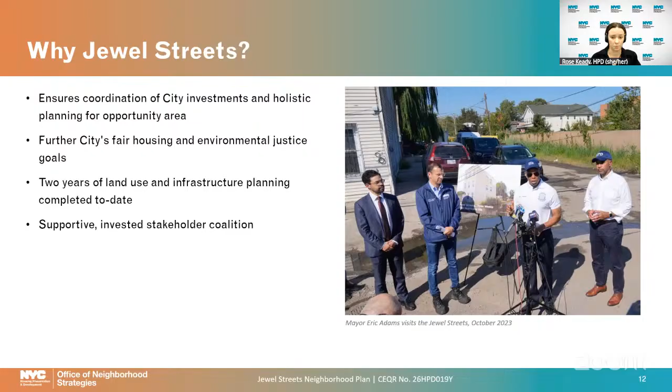The plan is also the culmination of 3 years of public engagement and visioning with local residents and a really committed coalition of stakeholders. This holistic plan includes long overdue commitments to construct a climate-resilient sewer system in a neighborhood that has needed sewers for decades, new bus lanes and traffic safety improvements on Linden and Conduit, new housing on major corridors and city-owned sites, as well as ongoing enforcement to improve day-to-day quality of life as the long-term investments are taking shape.

So many of you are really familiar with the study area, but before we get into the neighborhood plan content, we're going to start with some background to show how we got here.

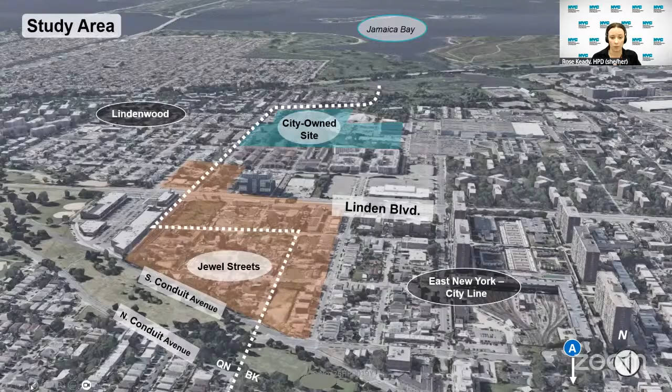Conduit Avenue is on the bottom of the screen and is our northern border. Both Conduit and Linden are really wide streets without many crosswalks, making it really difficult to get around the neighborhood. Last, the shape in blue is the 17-acre, largely vacant city-owned site 2 blocks south of Linden, where we see a big opportunity for a variety of uses.

So in the past few years, we've had a lot of community engagement to get to where we're at now in terms of priorities. We held 6 workshops with over 300 participants, 6 neighborhood tours, bi-weekly meetings with local stakeholders, and additional specific meetings for residents to speak directly with agencies about quality of life concerns and the immediate short-term work being done in the neighborhood.

So the work in the Jewel Streets has really been happening for both the short and the long term, running on parallel tracks. There's a lot of work on the ground that's already been happening in the neighborhood. We have some really amazing agency partners, including the 75th and 106th precincts at NYPD, DOB, DSS, and DSNY, who have mobilized under the umbrella of Community Link to conduct joint agency operations to address the most immediate quality of life issues in the neighborhood.

DEP has also already been doing a lot of work in the area to provide temporary relief to flooding conditions while developing the long-term drainage infrastructure plan for the neighborhood, including installing catch basins and constantly responding to the neighborhood after storms. And DSNY and DOB have both been really critical on addressing the illegal industrial businesses in this residential area, addressing abandoned vehicles, and clearing up debris.

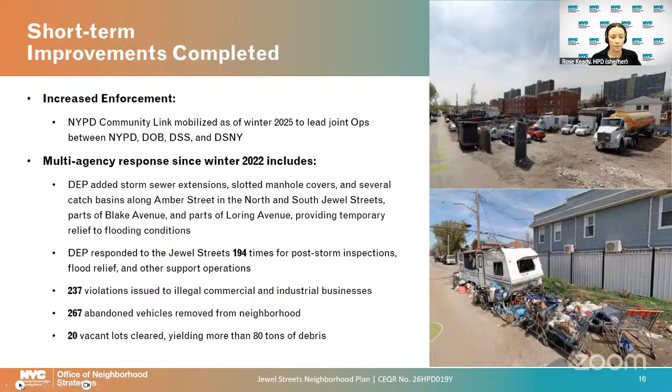But we know that installing new infrastructure is not enough, so we have many layers included in our plan to lead to a safer and better neighborhood. We've also developed a land use vision for the area, which Paolo will step through, but it's mainly defining what land use changes can support the future of this area.

And related to that, we've developed a community-supported vision for the city-owned site. This is a really big site which could accommodate affordable housing, jobs, open space, and also increase connectivity across the neighborhood.

We're working really closely with teams at DOT, thinking about the future of Linden and Conduit. There are active DOT studies happening on both corridors, and also in a wider strategy to make streets safer and make it easier for people to get around, including improving transit. And finally, we're also thinking about adding jobs, community services, and businesses to support a strong community.

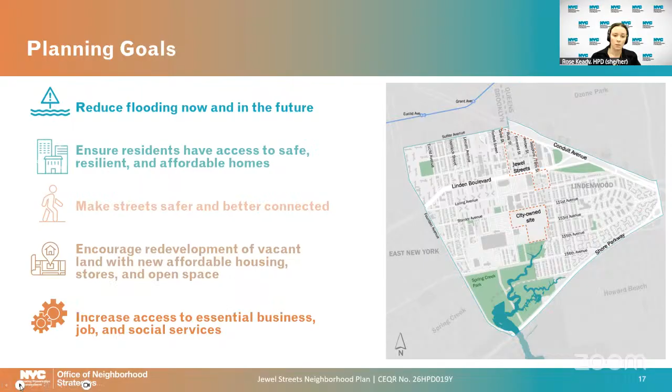Commercial uses are permitted in some places along Linden, like at the Lindenwood Diner, the former Cineplex, and Linden Center. Though as you can see from the zoning districts currently mapped there, there are a lot of gaps in where commercial uses are actually allowed to be built.

So we know that zoning is a tool that can really encourage development that's aligned with the community vision and all of the goals and strategies that we just went through.

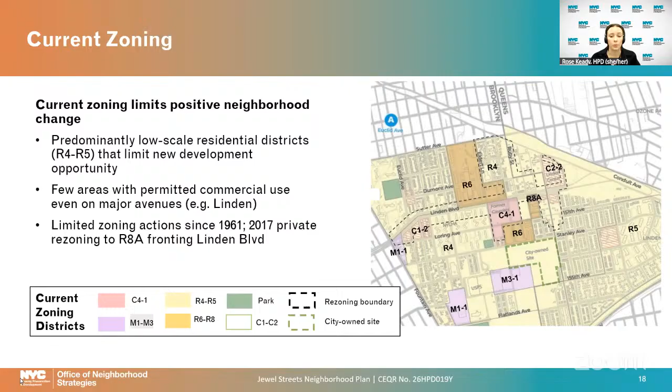On Conduit, we're not contemplating any land use changes, although DOT is working on a study here to rethink the street design and improve safety, which we're very much a partner on. And then lastly, in the Jewel Streets, our number one goal is to reduce flooding and improve quality of life through new green infrastructure like Bluebelts and other capital investments.

And this planning framework really lays the groundwork for our proposed rezoning, which Paolo will share later in the presentation.

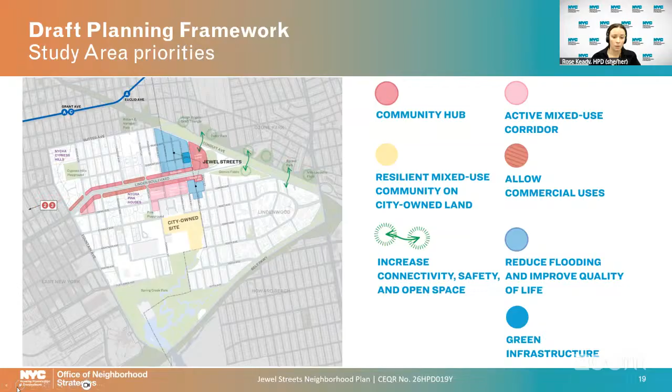So just to quickly recap where we're at today, this planning process really started from a call to action letter that Jewel Streets residents, community organizations like the East New York Community Land Trust and Cypress Hills Local Development Corporation, and other local elected officials sent back in February 2022, asking the city to begin addressing the flooding, infrastructure, and quality of life issues in the neighborhood.

HPD started our engagement in June 2023, where we held those workshops. The last one was in October 2024, where we presented the draft strategies. We released our progress report in February, which included the planning framework that we just saw. And we released the neighborhood plan this October. Today, we're here at environmental scoping and looking to the near future next year. We'll be starting the neighborhood plan and Bluebelt Joint ULURP.

And with that, I will hand it to Paola to walk us through the drainage, transportation, and land use strategies by sub-area.

Thank you so much, Rose. So getting started with the Jewel Streets, the goal here for this sub-area is to really create a more resilient and connected neighborhood with better drainage, improved streets, and new housing that can respond to future climate impacts.

So we're doing this by continuing the immediate short-term quality of life work in the neighborhood in partnership with many agencies that Rose talked about earlier. And at the same time, we're looking to the future. So DEP's drainage infrastructure plan will guide this change, and we'll get into the details about that next.

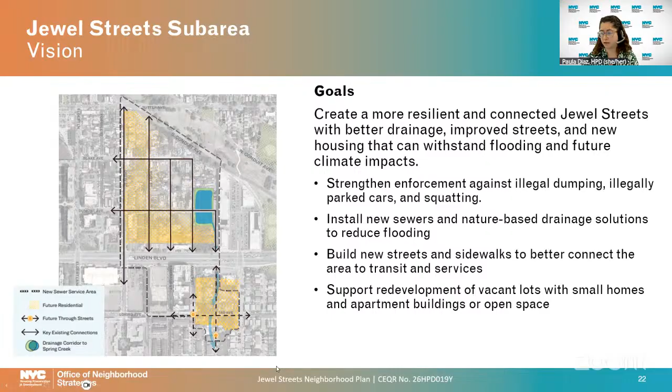So we know that you're familiar with the area, but before we go into the drainage strategies, just want to spend a minute talking about why the Jewel Streets flood.

So there are two main factors at play. The first one is that the neighborhood is in the historical path of Spring Creek. So the streets are below grade and there is a high water table. And in addition to that, there is no stormwater or sanitary sewers.

So what that means is that for the water, it's really easy to get into the neighborhood. And once it gets there, it's really hard to drain it out.

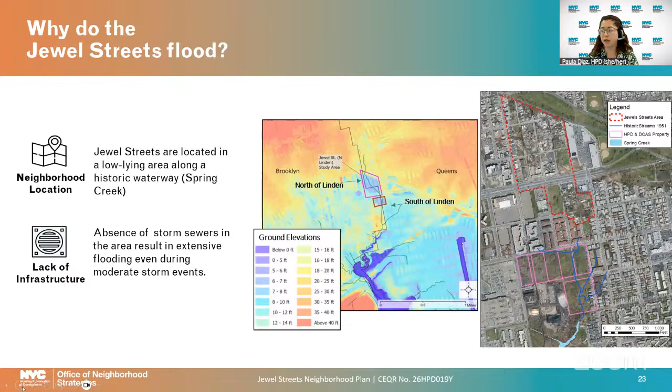So what are we thinking in terms of the future? What you see here is DEP's holistic drainage infrastructure plan, which includes a mix of gray and green infrastructure with components in the north and the south Jewel Streets, as well as in the city owned site.

So the key features of their plan are a network of four blue belts or retention ponds, two in the north Jewel Streets, that area that you see in blue, two in the city owned site further south, new stormwater and sanitary sewers for serving this neighborhood, and also new raised streets in the Jewel Streets, that in the south we know that it would be up to 10 feet for the water to be able to get through gravity to the city owned site.

And finally, all these systems are complemented by a storm and sanitary pump station that will be located in the city owned site, taking the stormwater to Spring Creek.

Here, we also want to highlight that this plan is really designed to meet New York City's highest stormwater service level, managing a rainfall from a 10-year storm.

That is approximately 2.3 inches of rain per hour. And just for context, most of New York City is still designed to serve up to 1.7 inches of rain per hour. So DEP is really thinking about serving this neighborhood in the future.

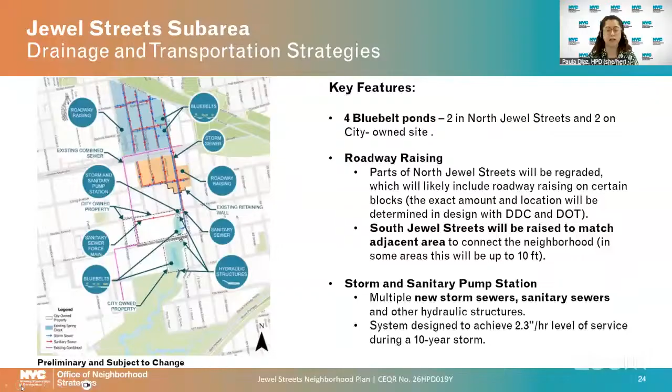So in this cross section, you can see how these components are working together a bit more clearly, and how this is a creative and holistic solution for the neighborhood. In blue, you see the stormwater system, and in brown, the sanitary sewer system. In blue, you see how the stormwater system is complemented by the network of blue belts, or retention ponds. This nature-based solution is used to filter the stormwater and also serve as open spaces that residents can enjoy.

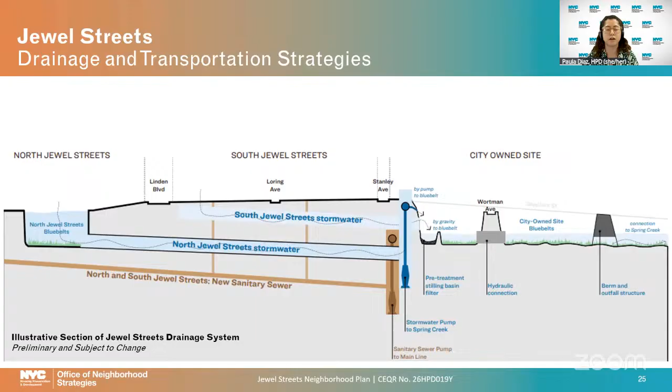The water from North Jewel Street is being directed and pumped to the city owned site, and then the water from South Jewel Street is going by gravity to the blue belts. The sanitary sewer from the north and south are combined, and they're being pumped to DEP's main line, also on the city owned site. That will really eliminate the need for septic tanks in the neighborhood, which is one of the key drivers for environmental justice in this neighborhood.

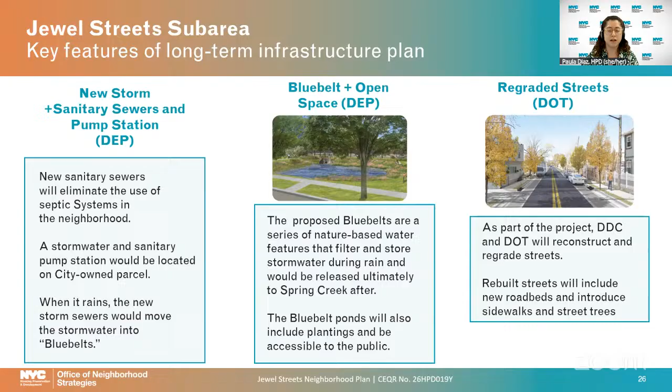So we went through these components already. This is just a summary of everything we just discussed, but here we want to highlight that in addition to this new drainage network, the streets will also be regraded in a project led by DOT and DDC, and this will bring sidewalks and trees to the Jewel Streets.

Supporting all the infrastructure work we just discussed, we're also really excited to share that, back in September, the Jewel Streets will actually be a pilot neighborhood for the city's new resilient acquisition program. This program is being piloted here to ensure that residents living in the most impacted and lowest lying portions of the neighborhood will have the city's support to navigate options to relocate to less flood-prone areas.

At the same time, as part of this pilot, the city will also work with homeowners to navigate options to retrofit their homes as the long-term drainage plan takes shape. The expression of interest you see on the screen has been live since September, and the city has already received some interest from residents.

Moving on to land use, starting in the North Jewel Streets, here we really want to support the redevelopment of vacant land and industrial lots in the areas where we know the planned drainage infrastructure will be able to support this new development.

We'll go one by one. We're going to start with the light yellow portion in the middle of the screen where it says R5. Here we'd like to support the level of density currently seen on Drew Street, where there are small homes and apartment buildings. So we're proposing a slight bump in density, going from R4 to R5. That means going from allowing 2 to 4 stories, matching the zoning of most of the surrounding neighborhoods. This area will be serviced by the new drainage infrastructure DEP is planning and the new streets, so this small increase in density is really to allow for new infill housing on the vacant lots.

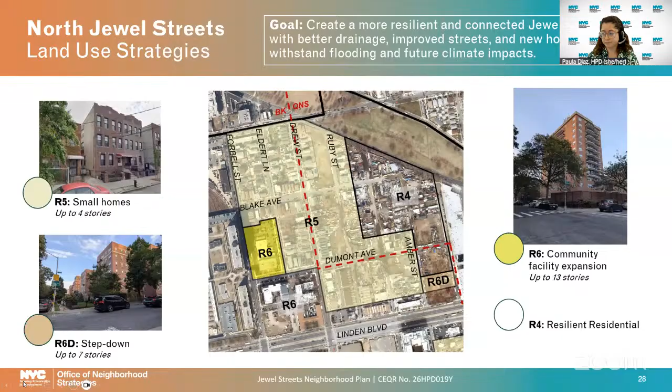So in the South Jewel Street, as part of the planned drainage infrastructure, there will be new elevated and reconnected streets, which could encourage a mix of uses such as housing and open space. Mirroring what we went through in the North Jewel Streets, we're proposing a rezoning from R4 to R5, allowing for small homes and apartment buildings of up to 4 stories, matching the zoning of most of the surrounding neighborhoods.

Below Linden, mirroring what we saw in the north, we have a step-down district to transition to lower density. Along 79th Street, which is at grade and has access to sewers, we're proposing an R6D district, up to 7 stories, and closer to Linden, an R6A, up to 9 stories. We're including this last one on the map, but it's actually part of an existing private application currently in review.

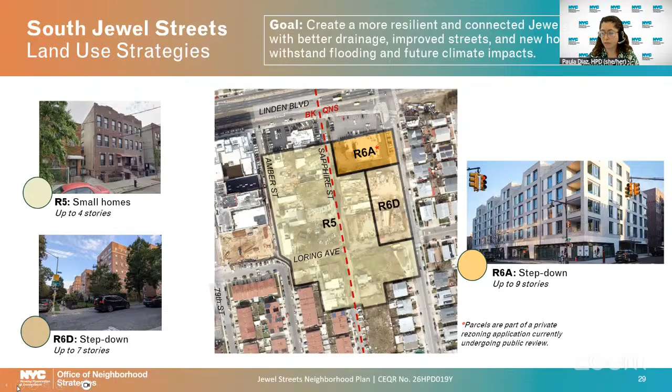Moving on to Linden, our goal here is to support a safer and more active corridor through adding new affordable housing, businesses, and community services. This includes making the boulevard safer for pedestrians, improving connectivity to transit, and encouraging the redevelopment of vacant lots along the corridor with new housing, stores, and community spaces—everything we heard throughout community engagement that is much needed in the area.

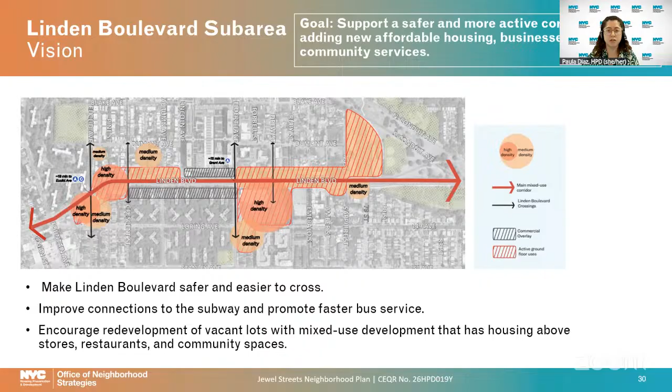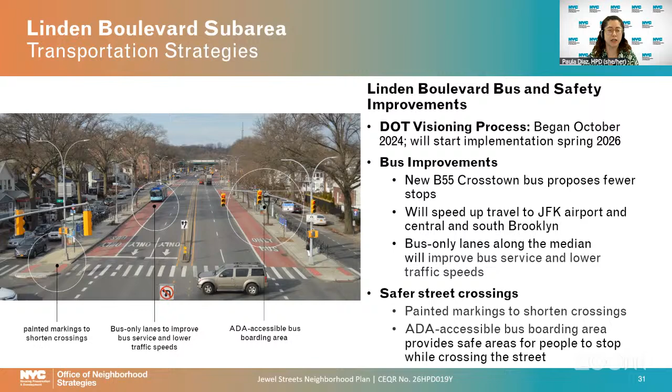Moving on to transportation, DOT is currently working on a bus and safety improvement plan for Linden, which they began late last year, and implementation of some pedestrian safety measures will start as soon as next spring. So we're looking at DOT when it comes to transportation strategies. In the interest of time, I'll keep moving to the land use piece on Linden.

Linden connects the neighborhood to other parts of the city and has the potential to knit these neighborhoods together, connecting East New York and Lindenwood, both North and South Jewel Streets. What you see in pink is a proposed increase in density across the corridor to a C4-5D district, up to 12 stories, to spur development, especially on vacant lots, with multiple floors of commercial uses below housing. In darker red, you can see our community hub nodes at two key locations connected to streets that go up to Euclid and Grant Avenue subway stations.

We're planning for densities of C4-5X and C4-5, up to 14 stories, to create these activity hubs with a mix of retail and community services on the ground floor and housing above. In hot pink, you'll see a C2-4 commercial overlay, which doesn't change the underlying residential zoning—it simply allows flexibility for commercial development to occur in the future if desired on these Linden frontages, complementing the active corridor along Linden. Lastly, same as for the Jewel Streets, in orange we have R6A and R6D, allowing 9 and 7 stories respectively, responding to Linden as a step down before the lower density residential.

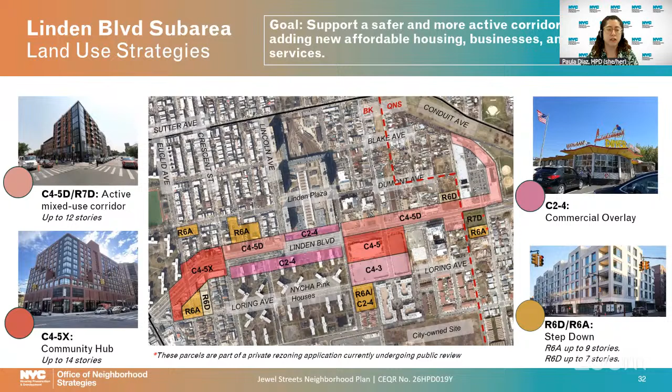Moving on to Conduit, the main goals here for the corridor are to increase connectivity, safety, and open space, and also focus on reconnecting the communities on either side of the corridor and making it better for pedestrians, bikes, transit, and cars.

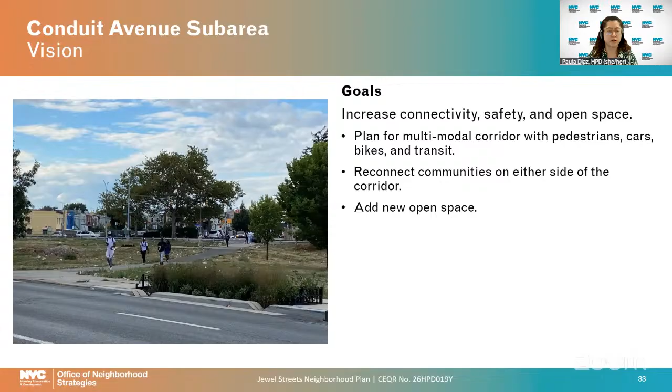As we mentioned earlier, in Conduit we're not considering any zoning changes, so the main strategies here come from DOT's existing study, which includes the Jewel Street section in the middle but goes from Atlantic Avenue in Brooklyn to Lefferts Boulevard in Queens. They've already begun their work—some of you may have joined their workshops. Their plan is to release a final plan by the end of 2026, with implementation to follow. Their possible outcomes for the study focus on safety.

That means more space for people walking and on bikes, including crosswalks with shorter crossings. The second focus is green space—public parks that include drainage systems like green infrastructure and retention ponds, because that median really floods a lot. The last is reclaiming and activating the median for community uses.

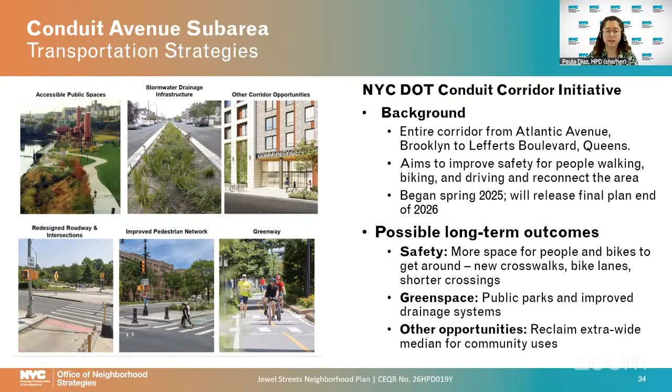Moving on to our last sub-area, the city-owned site, we think this is a great opportunity to develop a resilient mixed-use community with affordable homes, retail, and community spaces. We're thinking about new streets that can break up this super block and reconnect the neighborhoods south of Linden, as well as new open space and green infrastructure to benefit both the new development on the site and the broader neighborhood.

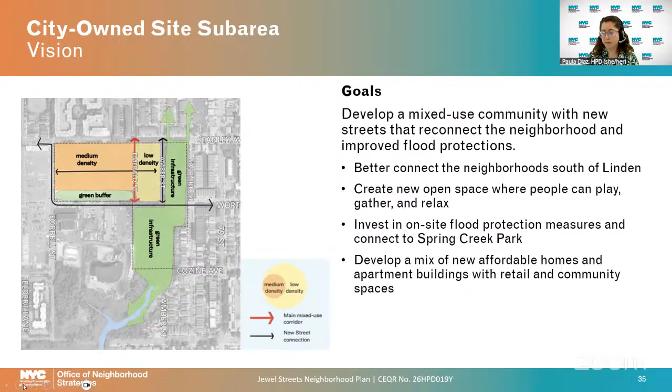Focusing on the drainage and open space strategies, starting with drainage: the green infrastructure located on the site can support DEP's continuous drainage corridor that connects north of Linden Boulevard, through the Jewel Streets, down to Spring Creek Park. This supports the drainage solution for the site and the surrounding area.

On open space, the Bluebelts, like the ones on the Jewel Streets, will be accessible to the public with walking paths and seating areas. These open spaces also connect to the restoration of 40 acres of wetlands around Spring Creek being done by the Army Corps of Engineers. The site can also include other open spaces, like a commons and smaller plazas for people to gather.

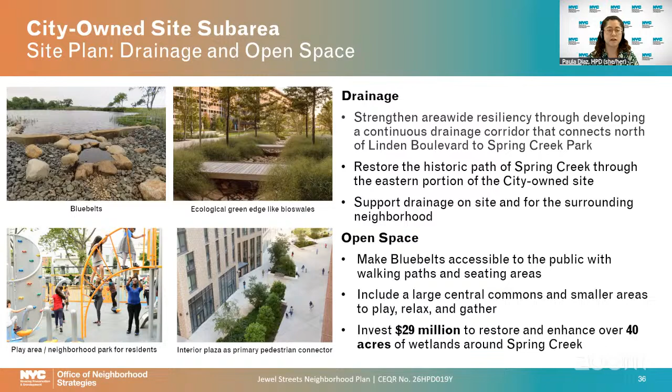Moving into transportation and land use, we're working closely with urban design consultants and the Department of City Planning to summarize and show what we heard throughout the community engagement process. This map highlights the transportation and land use priorities for the site.

On transportation, the main focus is completing the missing links in the street grid, making Wortman the main east-west connector, and continuing Amber and Emerald as north-south streets, prioritizing Emerald as a neighborhood connector since it goes up to Linden Boulevard.

For land use, density can be moved around the site, but the general thinking is higher density toward residential buildings along Linden and the nearby NYCHA campuses, and lower density near the homes by Lindenwood, Queens. We're also thinking about a mix of homeownership and rental, as well as a commercial overlay that would allow retail and community spaces to activate the area.

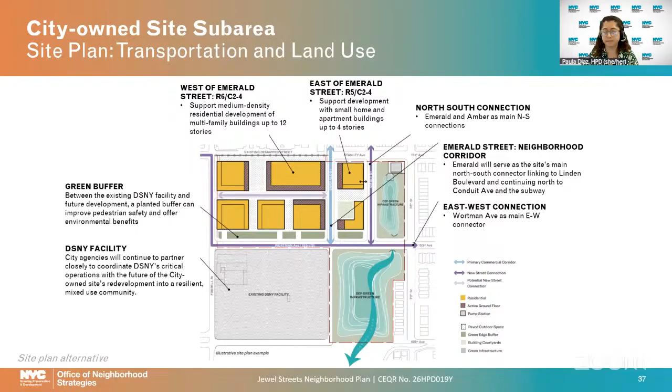What you see here is an illustrative drawing of what is possible, highlighting the priorities and key components identified through the community engagement process, with some callouts. This is one of three examples included in the neighborhood plan.

One of our priorities is having a mix of different scales, so you can see maisonettes at the base of higher buildings, for example.

In terms of open space, we're focusing on a mix of spaces including plazas and playgrounds that relate and connect to DEP's proposal of a green infrastructure retention pond, while also thinking about a buffer toward the existing Department of Sanitation facility to the south.

Finally, having an active ground floor is a big priority for us. The commercial overlay can support this, allowing retail, community facilities, and services.

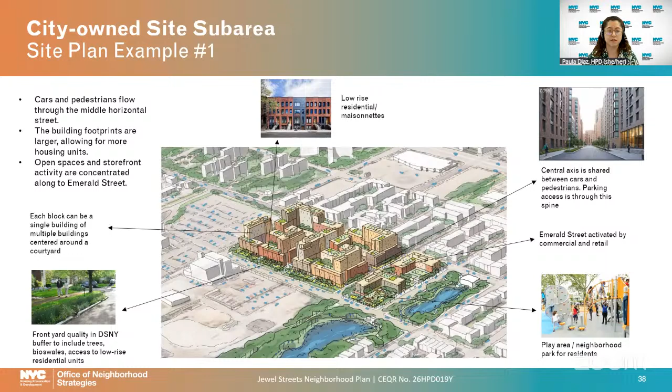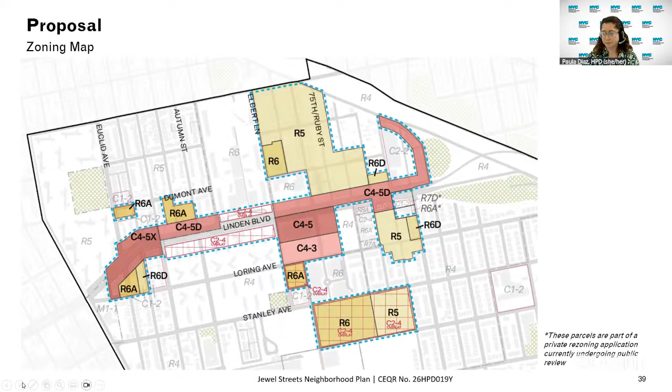Moving on to the proposed land use actions. These are the actions included in the draft scope of work that Anthony mentioned at the beginning, and that we're using as the basis to analyze the impacts he's going to go through.

For the general study area, we have zoning map amendments that include all the zoning changes we just went through in all of the sub-areas, and zoning text amendments to map MIH areas, as well as a floor area exception for schools within the MIH areas in both Brooklyn CB5 and Queens CB10.

Specifically on the Jewel Streets, there are land use actions related to DEP's infrastructure work, including site selection, acquisition, and disposition of land, as well as acquisition actions giving the city the ability to implement the resilient acquisitions pilot. Specifically on the city-owned site, we have city map changes to map some of the unbuilt streets that go through the site.

We have disposition of city-owned property, and finally the designation and approval of an Urban Development Action Area. And here I will pass it to Anthony.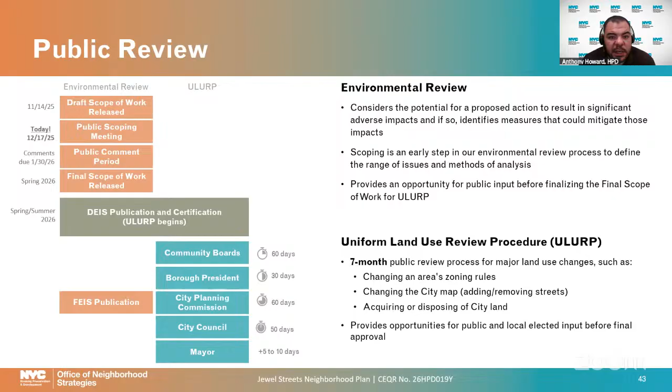After HPD submits all the application materials, the certification of the application is effectuated, and there is a public meeting with the City Planning Commission to kick off the ULURP process, which would then go to the community boards, borough presidents, City Planning Commission, and finally the City Council and the mayor. All of these stakeholders have a specific timeline to hold a public hearing and vote on the proposal. We want to highlight that there will be many public hearings throughout the process, and there will be opportunities at each stage for the public to have a voice in the review.

So for the environmental review, HPD, as I mentioned prior, is the lead agency. The build year or analysis year for the proposed actions is 2040. That means the EIS will be analyzing the potential future conditions at the year 2040, when we expect all the development from the proposed actions would occur.

The framework for the analysis as proposed is the following. There would be an introduction of 5,150 dwelling units, including up to 2,477 affordable dwelling units across 33 projected development sites. Around 1,458 of those dwelling units are projected to come from the city-owned site alone.

The proposed actions would also generate around 147,948 gross square feet of commercial uses, being local retail, supermarket, and offices. And it would also generate around 256,459 gross square feet of community facility uses, which could comprise of medical offices or houses of worship.